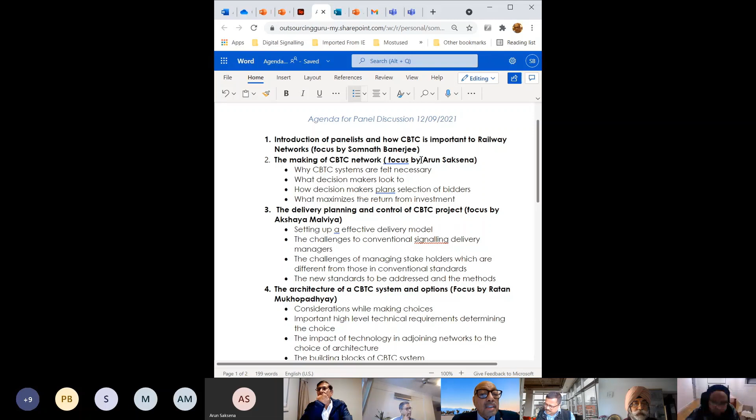We are going to first get Arun Saksena. I'll just give a quick introduction to our participants, meaning the panelists. Arun has been a very experienced and key decision maker.

He is a railway engineering professional with 40 years of experience in the development and approval of design, installation, testing, commissioning, maintenance and operation of signaling and train control telecom systems. He also has great insight into the system architecture of things which make the signaling systems, like software embedded systems, then the signaling schematic plans and systems which can work in a safety critical and secure manner.

He has held many important positions in his career. Before he retired from the railway service, he was the general manager of the North Central Railway. He had worked as advisor and executive director Signals on the Railway Board of Indian Railways. He has also worked as a divisional railway manager.

He has been working as head of a new unit of modern signaling systems in RailTel just after he retired from general manager. So in these roles he has obviously a very good exposure to things which make a railway system, how the decision makers work, exemplified by him. So he will give some insight into how the CBTC systems are decided.

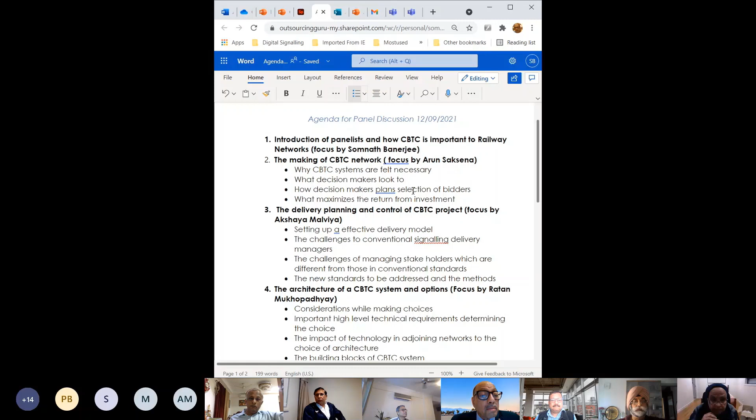We have a large number of highly experienced persons on the panel as well as in the group, but we will first get a quick glimpse of what CBTC is and how it gets done, and then move over to have some technical insights as well. It will be about 30 to 40 minutes for the panelists, and then the floor will be kept open for the guests to ask their questions to the panelists, and that is how we intend to progress in this meeting.

Can I ask Arun to start off this meeting today? Arun, over to you. Thank you, Somnath, and thank you to the entire group of experts who are on the panel, and the elaborate list of attendees. Many of them are real experts in the area.

I would like to mention, from the angle of how CBTC started in India, what strategies we had adopted at different stages, and how it has now become a norm in India. How much time is given, Somnath? At least do 10 minutes, definitely. Okay, thank you so much.

If you look at how the mass transit systems evolved, initially we all know we had the traditional or conventional systems of automatic block signaling, and we were able to handle traffic with that kind of system, handling headways of up to the order of 3 minutes. In fact, the Mumbai suburban section is a very good example of having a headway of 3 minutes, both on Central as well as Western Railways, with only tweaking the inter-signal distances and the aspect control, making it four-aspect.

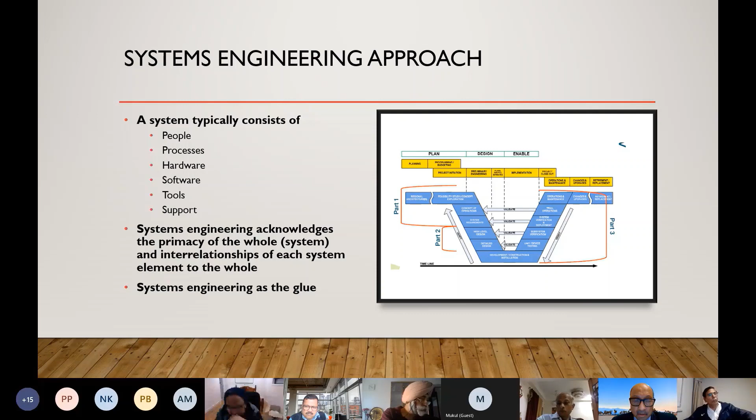So all the subsystems of a system need to be interfaced and integrated in such a way that we are able to achieve our objectives. So a whole-of-system approach is something that systems engineering leads us to. Systems engineering is also known as the glue between these subsystems, and that helps us in the delivery of a whole system.

How is it done? In Australia, I was working on the metro tunnel project, where the systems engineering approach was being adopted following a robust gate review process. And what is that gate review process?

It starts from concept and goes up to finish. So from concept through to finish, there are several gate reviews: system requirement review, then system definition, preliminary design, critical design, issued-for-construction design review, test readiness, integration readiness, and the system acceptance review.

System acceptance is the last activity, when something that has been commissioned is handed over to the client. And then all these things require some kind of audit, documentation, approvals, and timelines.

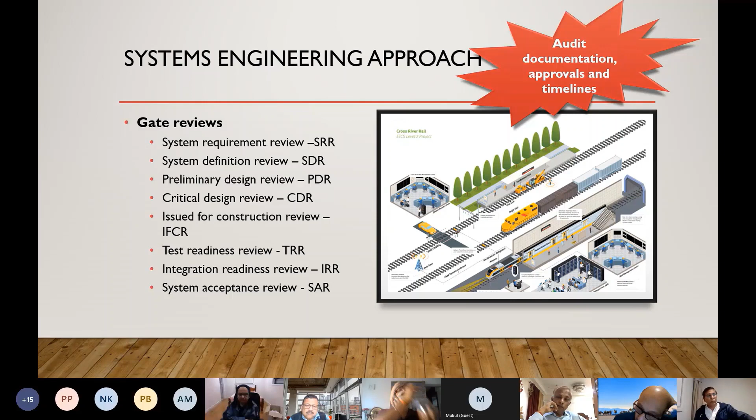So the next important thing in the project delivery of a CBTC project is migration planning. You start with the migration planning, devise everything, plan everything, and then deliver it step by step.

The things considered here in Australia, the most important ones are the staging of a project, and the T&C - testing and commissioning strategy. We also consider the greenfield installs and the brownfield installs, and there's a different methodology to design and install greenfield assets versus brownfield assets.

There's a concept of shadow mode working, where we install things in advance in parallel to the existing systems, and we run these systems at night when there are no trains, in shadow mode. We keep testing until we are 100% sure that the system we're going to deliver is going to work safely. So these are the things we do here.

Track occupations - in India there's a concept called non-interlocking. In Australia they call it possessions or track occupations. Training to maintainers and training to drivers is also a very important area that cannot be ignored. Then there's asset data update after the system is commissioned, spares, and as-built documentation.

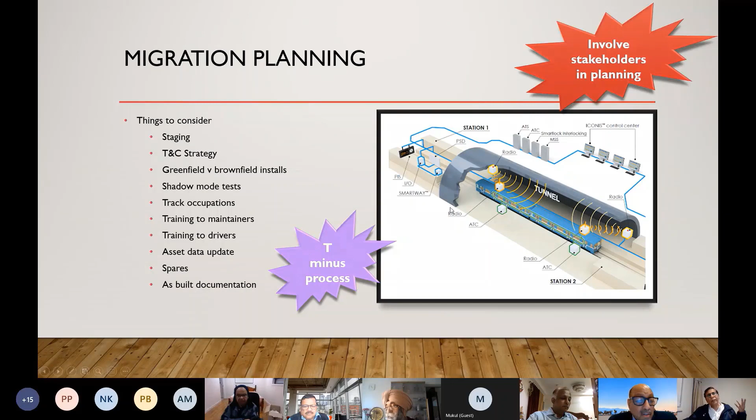And then there are things in the operational readiness plan. These are well defined, and we follow that process. In the planning, we also involve the stakeholders. The project delivery phases here in Australia are like this. Several organizations have got several systems, but generally this is what we follow here.

Moving on, the concept phase is the first phase where we decide the scope, requirements, interfaces, functionality, and risk of a project - everything is put together. We do a lot of concept designs. The concept phase is very, very big in Australia. So when you do a CBTC project, say for 40 kilometers, the concept phase will normally take about 2 years.

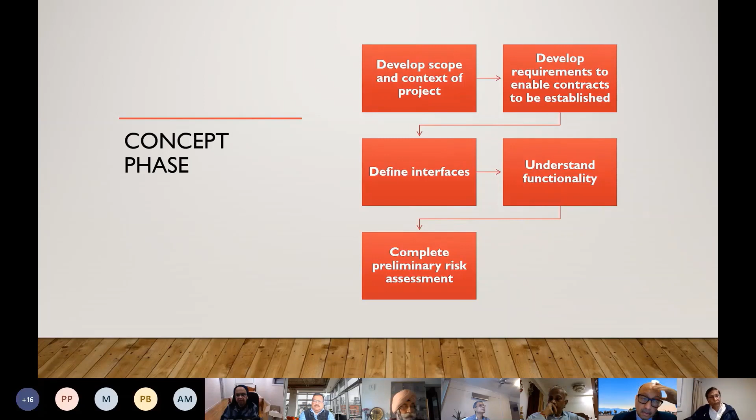Once the concept phase is complete, what you get is a structured, apportioned, measurable, and achievable set of requirements - that's the objective of this phase. It takes a bit of time, but once it's done, we know what we are going to deliver. Then the preliminary safety-in-design report is also delivered.

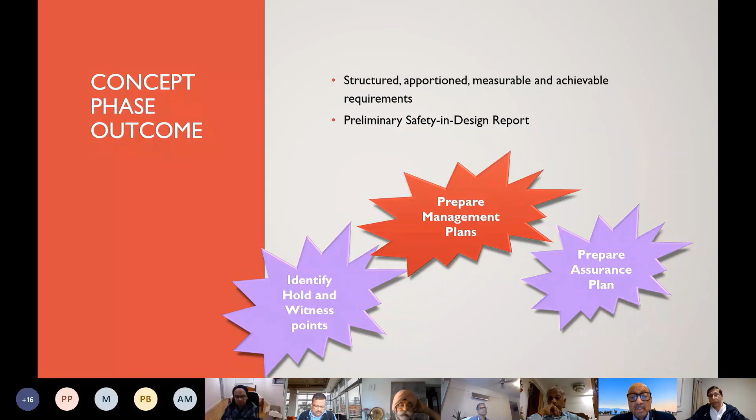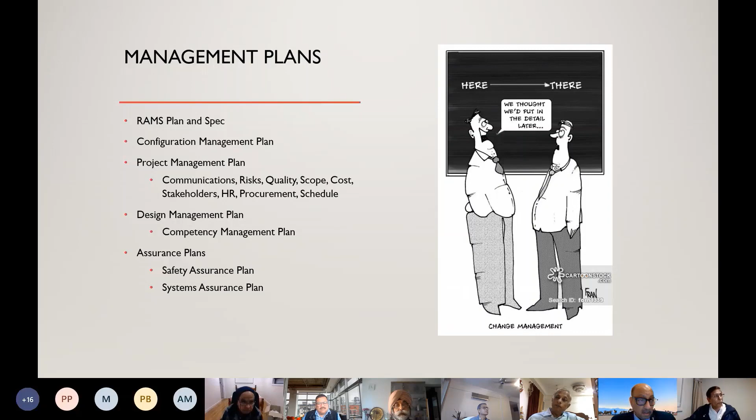We also prepare a management plan, identify hold and witness points, and prepare assurance plans. Management plans are several - like configuration management plan, project management plan, comprising various things in terms of PMBOK, and the design management plan, which includes competency management plan and the assurance plan.

Systems assurance plans cover two different areas: one is system assurance and the other is safety assurance. We prepare all those things in advance, then we move on to the development phase.

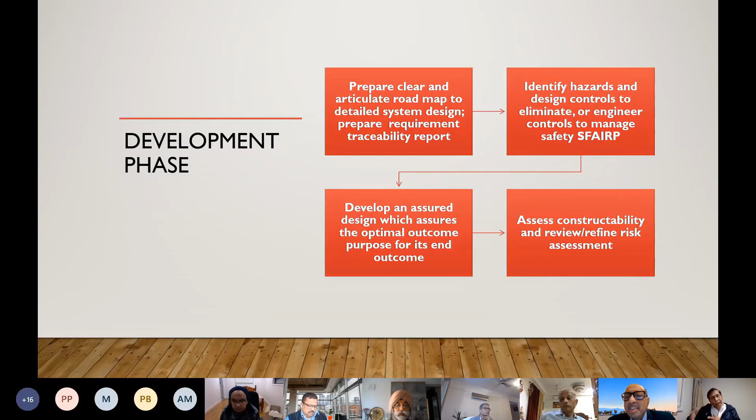The development phase is basically to do the detailed designs. Once we complete the designs, we prepare a requirement traceability report or matrix, because we are following the systems engineering approach. Then we identify hazards, design controls to manage those hazards, develop assured designs, and finally do a constructability review of those designs.

What is the outcome of the development phase? It is a demonstration that if the project is built as designed, then the RAMS requirements will be met. That's the outcome of the development phase.

We complete the final safety-in-design report, complete the safety case, and the testing and commissioning strategy is finalized by the end of this stage. During this stage, the clients review the designs, and also engage an independent safety assessor to do the assessment of the designs.

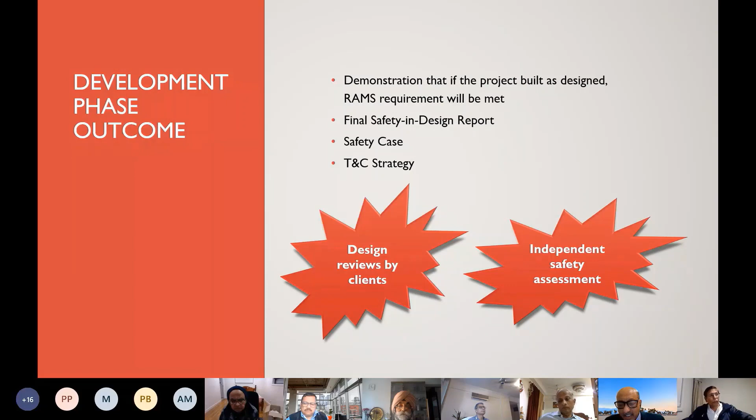The implementation phase is very critical, but it's not as involved as the concept or development phase. In construction, companies generally work independently once all the designs are done and IFC'd. The IFC designs are passed on to those constructors, and they generally proceed step by step, which is not as complicated as the concept and development phases are.

So construction is assured to make sure that as-built meets the design intent. Also in this phase, there is a go, no-go determination that is done, following the T minus process.

We start at T minus 20, and roughly at T minus 12 or T minus 8, we determine whether we should be going ahead with the commissioning or not. That is called the go, no-go determination, and all the logistics and everything are planned at that time.

The stakeholders and end users are continuously apprised of what is happening, when the changeover is taking place, and what the impacts will be—environmental impact, system impacts, and everything. That's how it is done.

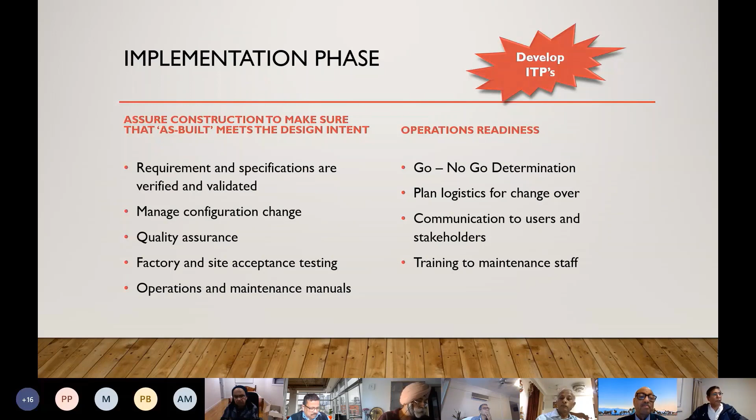What is the outcome of the implementation phase? Nothing but the final commissioning and on-time handback of the system. Track occupation is the start of delivery, and the on-time handback is the end.

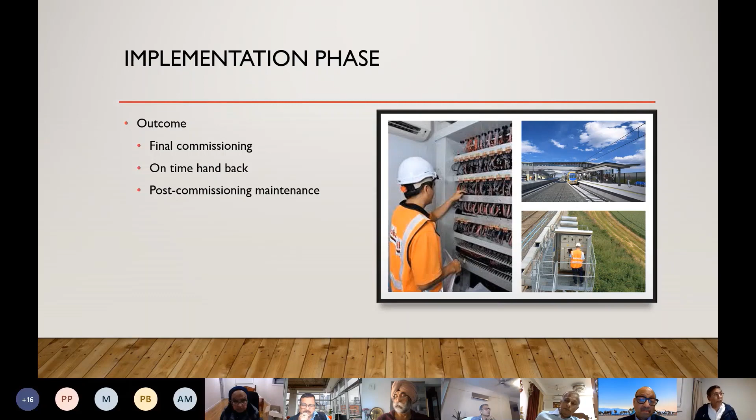There is always a requirement of post-commissioning maintenance, everywhere. The finalization phase is nothing but handover, as-built documentation, contract finalization, and project closeout. During this process, we identify gaps in the standards and update them, and also create new standards where needed.

When you are delivering CBTC on a network for the first time, the existing standards cannot be fully used, so there will be several gaps in those standards. We need to identify those gaps and close them, and also create new standards for the CBTC system if it is rolled out on an existing network.

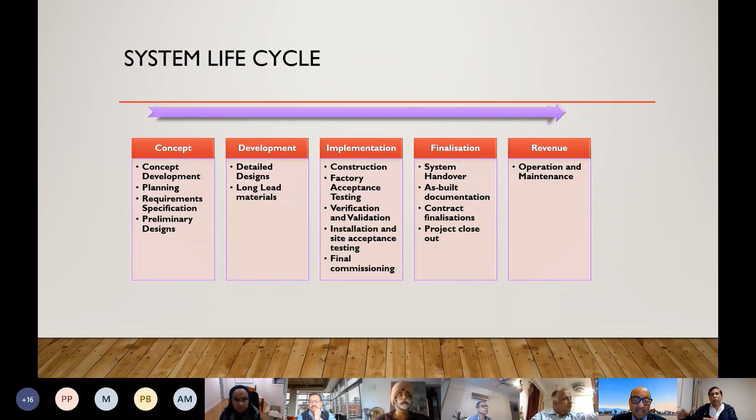System life cycle—this is a summary of what I've said: it starts from concept, goes through development, implementation, finalization, and finally the revenue phase, which is nothing but the operation and maintenance phase. That is it from me.

We'll take the questions at the end, because people will have a better understanding of where to direct the questions to.

From what Arun has started, Akshaya has finished, but in between there are two important stages: somebody has to create the technical architecture and somebody has to do the detailed designs. So we have Ratan to tell us about getting the architecture in place so that what you want to implement has some physical reality before you start doing the documents. Let's go to Ratan to hear about what architecture he would choose to put in a CBTC, rather the considerations, not the architecture itself this time.

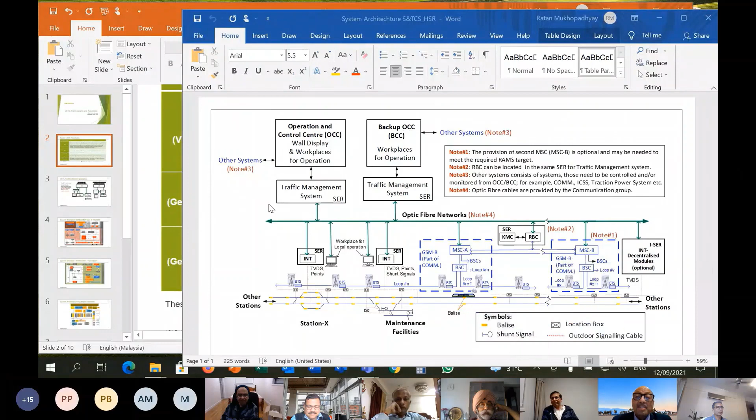I'll go through quickly because time is 10 minutes. One glimpse of CBTC architecture and the functions.

Now, we all know that in CBTC, for that matter, in any train control system for metro railway, we have ATP functions. These are the vital functions, and the automatic train operation function. These are non-vital functions generally, and ATS is train supervision in our system.

Can you switch over to slideshow mode? Are you not able to hear? No, go to slideshow mode. You are having the notes in between, right? Oh, I want to see. You choose the slideshow, just click it. I can go to slideshow, but I want to flip, I have other things. Okay, you flip, that's fine. Are you getting this right? Okay, yeah. One moment. Can you see this?

Yes, okay. So ATP functions, these are all vital functions, the most vital functions. And if you go to the standards and norms, it says that ATP function must be there always, and ATO and ATS are actually optional. We can choose from them.

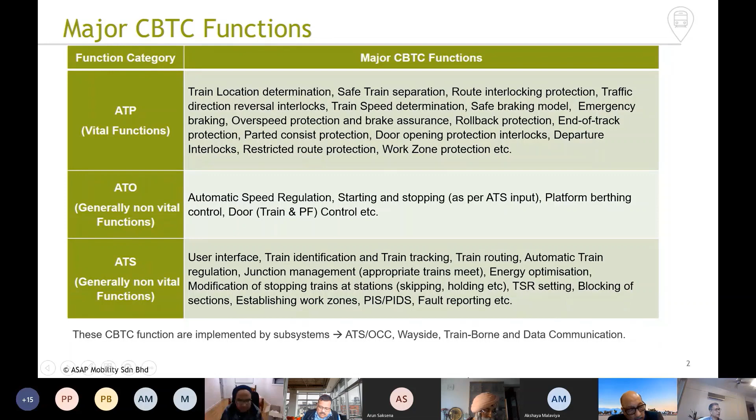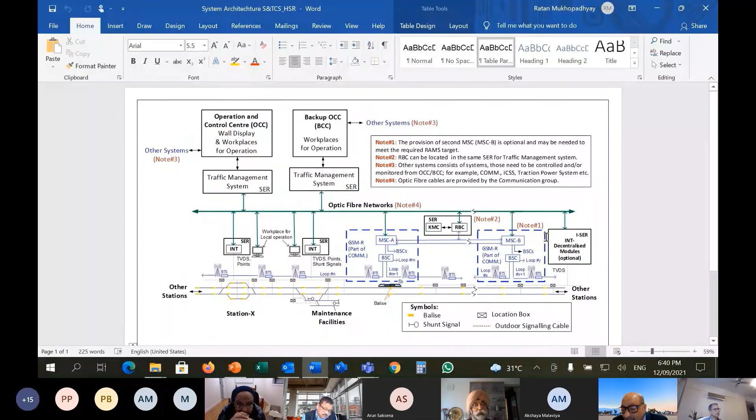Now let us see this thing. Now, if you see this, I want to show the specialty of the CBTC system. If you see the ETCS system, this is an example. The ETCS system, because the interoperability requirement is there, means the total system need not come from a single company, single manufacturer. So here, all the elements are more or less fixed.

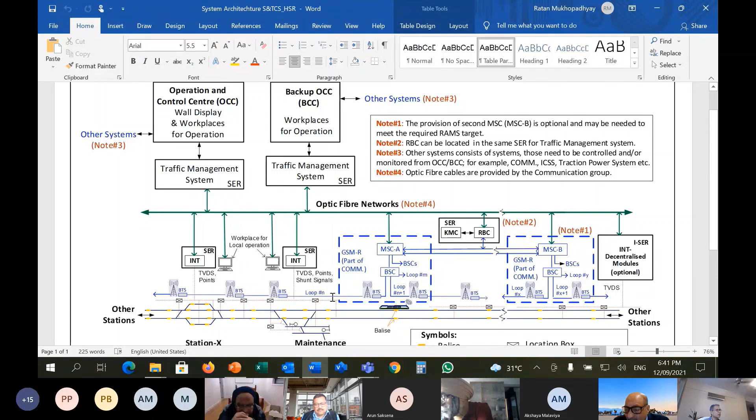Like we have a traffic management system, we have interlocking, we have, for example, GSM-R, radio block center. So all these individual elements, and all this network, the radios, they are all almost fixed. So the architecture, so to say, is almost fixed. Of course, inside interlocking, various companies will have different types of interlocking, it can be geographical, it can be based on table, or all sorts of things. But the functions, the interfaces, those things are all very rigidly regulated by norms and standards.

But the moment we go to CBTC, the situation changes because CBTC is a proprietary item. It doesn't have to, actually there is no interoperability requirement. And why is that more important for mainline? Because if you see the European railway, the train starts from Italy and goes directly over Switzerland, then Germany, then France, it goes through all these countries, and every country has a different system. So there it's important, but our metro railway is very small and very closed.

So that's why one advantage of this is CBTC can implement a lot of special functions like moving block function. We have to go to ETCS level 3 for that; we don't have that. This is ETCS level 2.

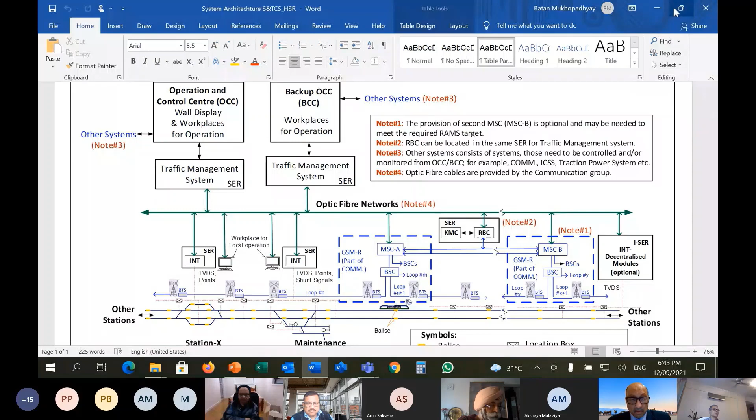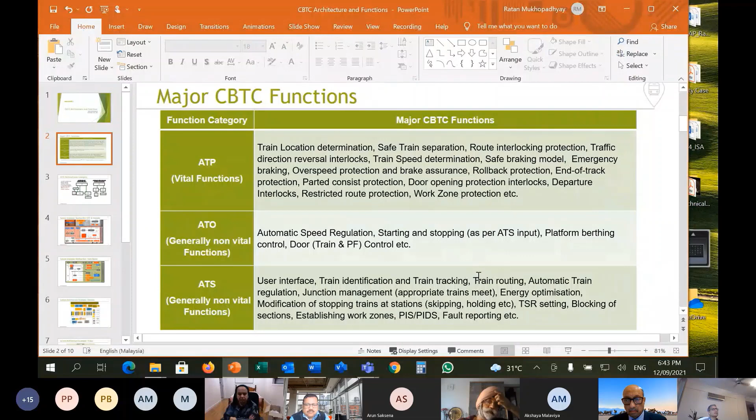That this should be the structure and these will be the functions. So that's the background. Now, for general type, you see the architecture with separate interlocking. You can have a separate interlocking connected to the wayside system, and this is ATS, and this is train-borne equipment, the signaling equipment, connected to the train subsystems, TIS. Here the only difference is no interlocking. Interlocking is integrated in the CBTC wayside, and it is directly operating the points, and not only points, all the field elements.

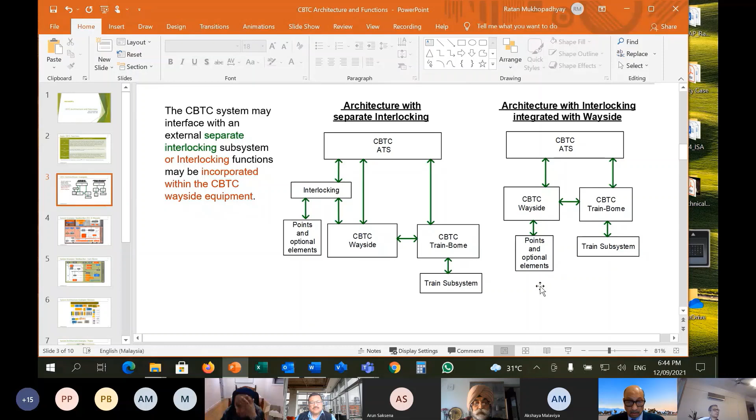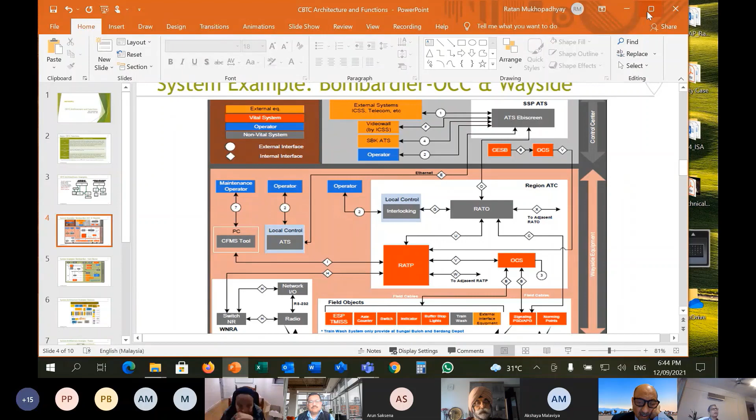So if you see the choice, let us see, this is the Bombardier. Now in the Bombardier, if you see, this is the ATS part in the OCC. So the top part is the ATS part, and here is the wayside equipment.

And you see the wayside equipment, this R is regional. This is the ATO function, then ATP function, then interlocking function. So this is all combined. And the red is vital system. So this is one rough architecture, and these are the field elements. You can see the axle counter and switch and all these things are there.

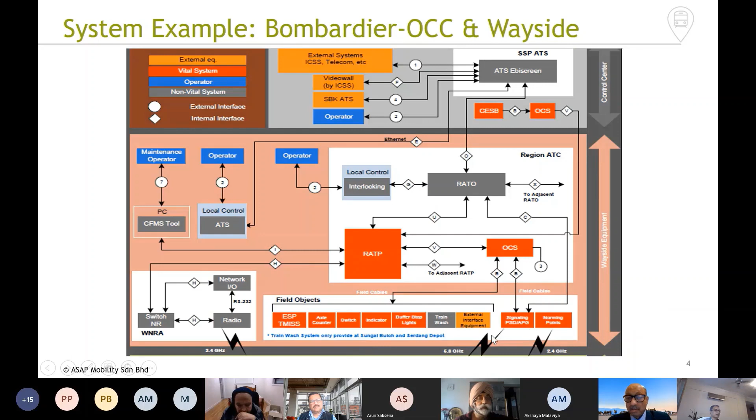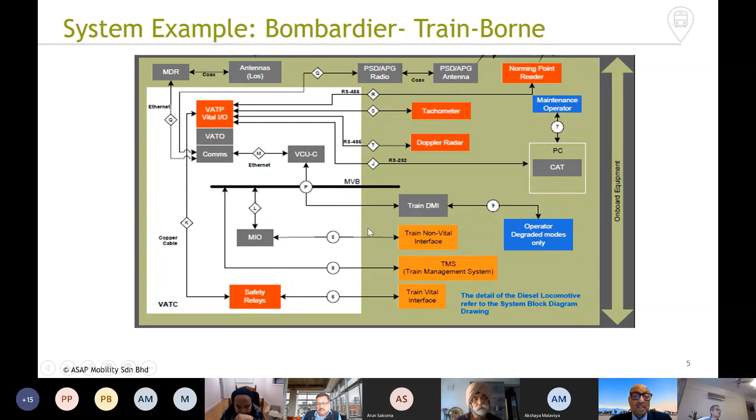And this is the train, and here you can see the radio communication going to the train. And there, if you see in the train, you have the vehicle ATP function, and then the ATO function, and vital function—it is through safety relays going to the train vital interface, the braking system and all other systems. So I think these are all well known, this tachometer. I'm only trying to show you the differences. So this is the Bombardier.

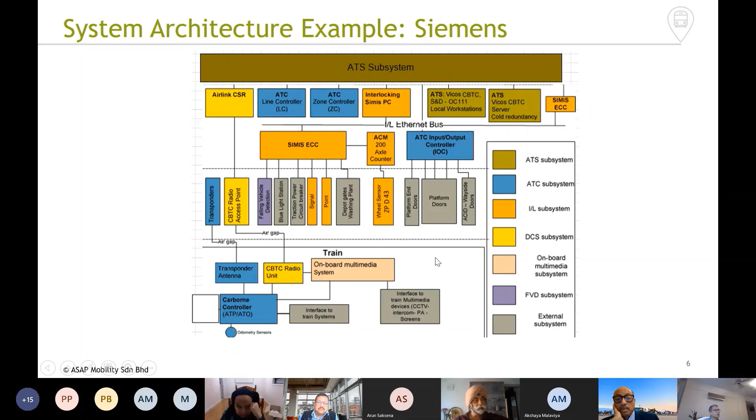So again, if you go here, this is Siemens, they have many versions. Again, I just want to show you. This also has got interlocking, and there's a remote control, all this thing, and they call it a zone controller. So every company gives their own special name—like in Bombardier they said regional ATU, ATP, and ATC, here they call it zone controller. So the terminology will be different, and the architecture will also be different.

Now, I want to give you certain examples of ATP functions that are allocable to wayside and train-borne. Like safe train separation—this can be implemented in the wayside equipment or in the train-borne equipment.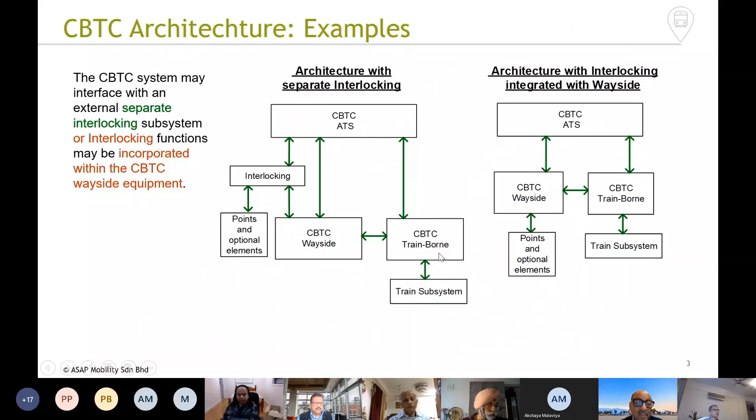So here there is no train to train communication. So we are coming to a situation like this—this is the ultimate goal of what we are trying to do. That if train-borne and train-borne talk to each other, if they have communication, then the train can itself generate its own MA, the movement authority or limit of movement authority. So this type of architecture, I think the work is going on. I have not got any document with a detailed design of this type of system, but this is conceivable, and it has certain advantages in terms of optimization and all that.

So here the basic idea is to take away as much function as possible from wayside to the train. The train will be almost independent—of course the ATS is there for its function. So one train is coming and it can order the field element, it can set the field element. So the interlocking function mostly will be there in the train, and some things will still be in the wayside. So that kind of architecture is also conceivable.

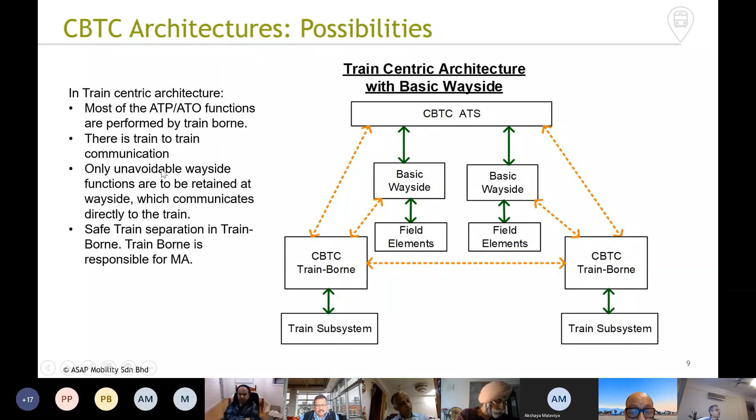So why is this possible? Because now with this type of architecture, all these functions can be done from either side. If you go to the norm, it is described like that - it can be done either by wayside or by train onboard. So that is the ultimate thing, a futuristic architecture.

But we have to remember certain wayside elements and minimum functions will be needed. When a train is setting a point from train onboard, it is not enough to prove that the point is set and locked. You have to hold it - other trains also have to get the information that this point is used by some other train, so one train should not be able to use a point that's already engaged. So all those interlocking functions will be partially or mostly done by the train, and some status will be retained in the point. If a second train interrogates the point, it should be able to tell that it's already engaged in certain other movement.

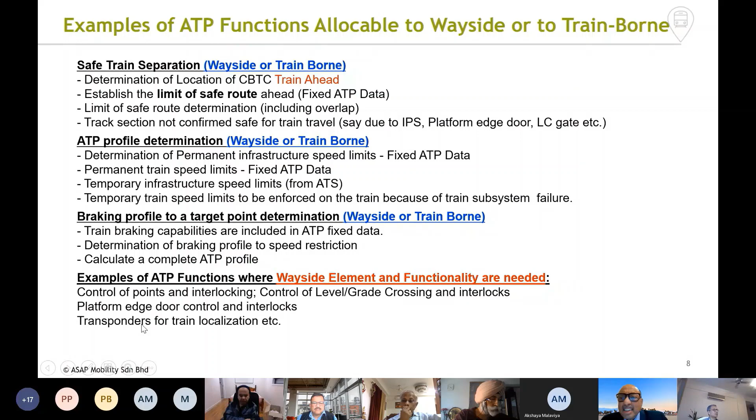So with this, I finished my presentation. My idea was to give the background on why different architectures exist - that is because the interoperability requirement is not there. That's the main thing. So that's all. Thank you.